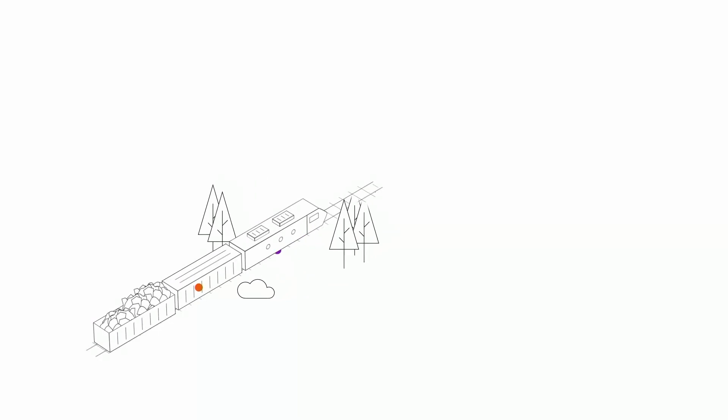Predge Rolling Stock is a cloud-based and hardware-independent analysis tool that manages data from various data sources. Data from onboard and wayside sensors, as well as historical system and component data, are collected and processed by Predge Rolling Stock as new data comes in. The actionable insights are provisioned to the different target roles in the organization.

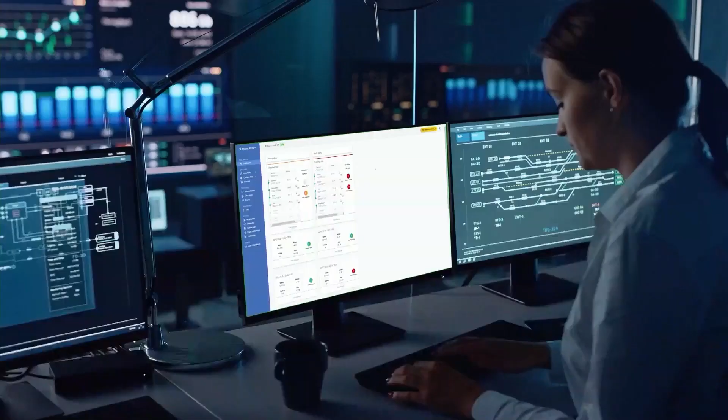Maintenance staff can directly obtain information that facilitates maintenance activities. Operating personnel receive information about asset conditions and operational performance. The outcome speaks for itself.

Thanks, Simo, for the videos. Great to see those testimonials in there. That must be very rewarding.

Thank you for elaborating what it is that Predge does. This will all make all the more sense when you, Stefan, elaborate what it is that voestalpine signaling does in this context. Before we hear how that all interconnects, because that's obviously going to be a very interesting part of the show. But before we do, please.

Thank you for having me back. It's a pleasure to be here.

So railway systems, as you know, signaling is part of railway systems, the world's biggest system solution provider for infrastructure, but also for systems, monitoring systems, rolling stock monitoring, infrastructure monitoring. So we have a lot of experience built up.

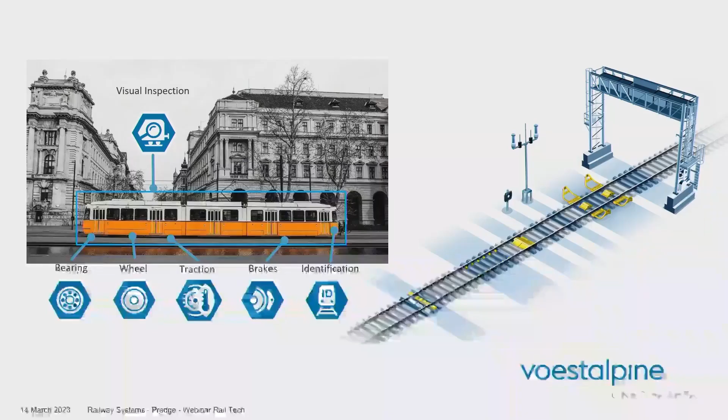And we usually looked at bearings, wheel sets, also the traction system, the brakes, identification of vehicles, which is very important because, as we talked last time, the identification is the key to then also do some maintenance, get history data in relation to the different assets to really see how an asset degrades over time.

So this is on the right side in this picture, you see also our checkpoints, so a combination of different functions. So you see all kinds of different functions in there. And as I said, we have a long-standing history already. And what I wanted to also demonstrate is the need for data analytics throughout our journey.

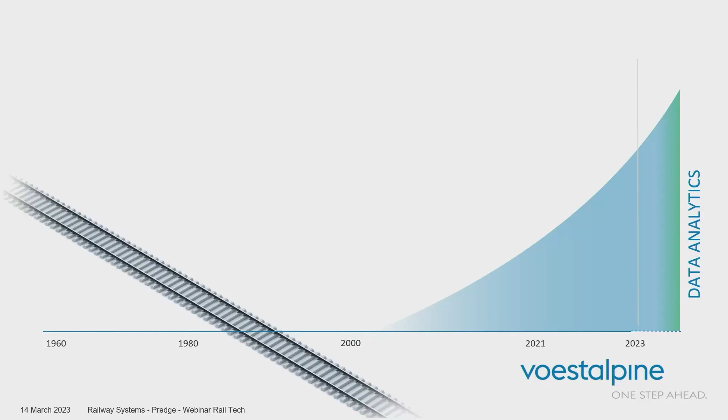So in the beginning, and this is a very crucial function, is the hotbox detection. So remember in the 60s, it's the classic, and recent events also in America, the catastrophic derailment, it demonstrates the significance of such a system.

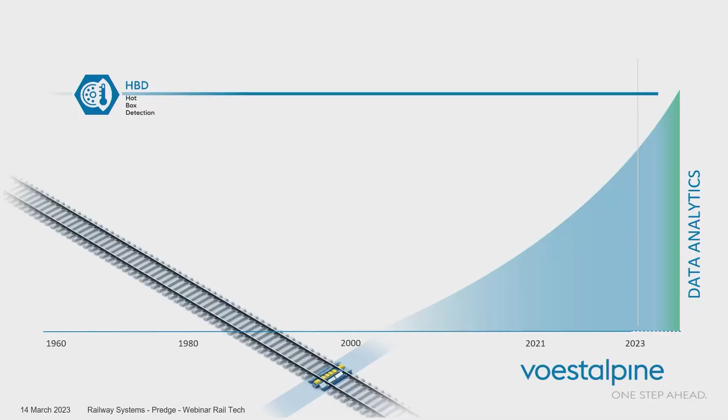And this kind of technology always alarmed. It just said, okay, you went above a certain threshold, the temperature is too hot, so I alarm and there needs to be a reaction. So when you combine that with another knowledge, with multiple HBDs, you get a series of data and you could already elaborate on that and do some trending and get additional information out there.

So already back then, there was a really primitive need for getting more information out of the data that you got. So quickly we innovated also into hot wheel detection, which is also an indication for how the brakes behave, for instance, and other functions like the wheel defect detection or weighing in motion, which is our WILD system where we also then detect defects on the wheel sets.

We then added the first time our central management software, which is the first time that we had a software in our place where we could manage the things, not only to look at the wayside monitoring equipment, but also to get history data, the alarming, etc.

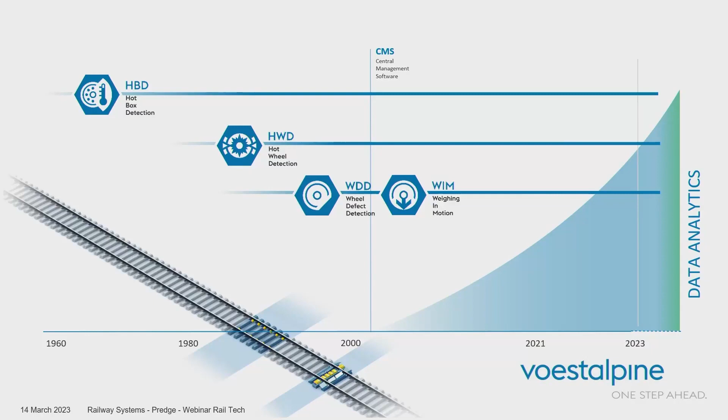So we already started very early with software, and we also built up basic analytic capabilities, but we were never recognized as really a data analytics company. And this is only natural because our competence and also the credibility towards the customers was always in the field of providing robust and high quality hardware, the sensors, and the IT infrastructure to monitor everything.

So we added a lot more functions throughout the years: environmental control, RFID tag readers, profile validation systems, and a couple of years back, our acoustic monitoring system. At some point we had so many functions that we wanted to do this modular, so you don't need a cabinet for each function. You want a modular approach with high degrees of standardization to build these checkpoints, which is a huge advantage for our customers since they can have standardized spare parts and add to existing checkpoints.

What I demonstrate here in the slide is that this is also the point where data analytics becomes more and more important, because the line keeps going up. Exactly, you generate more and more data over time.

So we had even more functions like hot motor detection, cracked rim detection, and last but not least, one of the last additions, our visual train analysis. Especially with camera systems, you have a lot of data involved. And it's fair to say, especially for viewers, it's important to recognize that a data analytics company's trustworthiness is only recognized by the customer's willingness to pay for the information they receive.

So the clients, Predge's clients, pay for information, not just data. But this does not automatically mean that they are also credible. To add the credible part, you need to build up a relationship with the customer and show that your analytics capabilities really bring value to the table.

This is one of the things where I can proudly say we're happy to have found Predge, because compared to what Predge can offer, we didn't have the credibility. We had the trustworthiness, our customer network worldwide, robust IT systems, and a lot of experience fusing data from different sources, like wagon series, etc. But we never dug so deep into the analytics part to provide this extra capability.

And based on what I've heard from Simo, there is a party that has that expertise. So I suspect that there's a lot of wheels here. You weren't about to reinvent the wheel, you sought cooperation, am I correct?

At some point you can only go two streams. Either you come up with a data analytics company by yourself, building up teams and trying to hire talent—and especially in data analytics, good people are hard to come by these days—or the other option is to try to acquire or cooperate with another company.

There are a lot of companies out there that already have a certain reputation, or claim they know special areas, but to really have the skill set and credibility in this specific field, we could only find in Predge. This is where we very early on tried to get in contact, and we hit it off quite from the start.

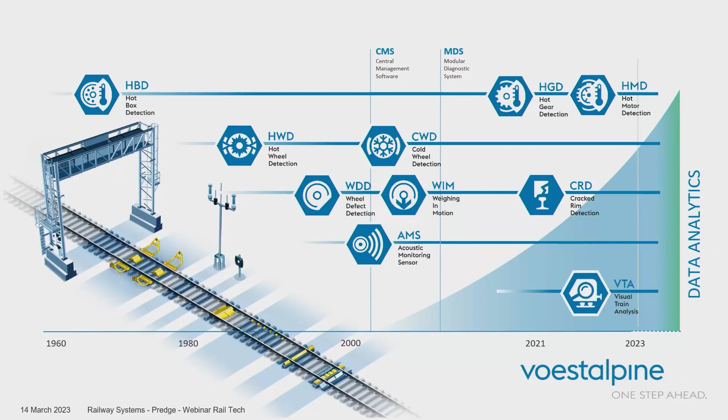We found that we have a mix and match here. Seeing and hearing all this, it makes sense that a legacy company of 160, almost 170 years old, would find a partner in a scale-up with 10 years of operation. But you could also be excused for thinking that's an odd matchup. But it definitely works—you have to think it through.

If you have somebody that goes to the client with expert knowledge in wayside monitoring—the infrastructure, how you build IT data streams, how you collect the data—and then somebody who has the means of understanding the customer's problem and narrowing it down to one specific problem and solving it, if you combine those forces, you can create a lot of value for the customer.

And we already have first success stories where customers see that value and see what we can do when we work together. In the next couple of years we will of course emphasize that and build it up. And when did this start?

Is this something recent, something set in motion a few months ago, or what can you tell us about that? I think the discussion has been going on for more than a year. It materialized during the last year—we did some tests, tried some things, and now we're in the phase where we know it will work. Now it's more about launching and doing this.

From Predge's side, looking at the cooperation, we're coming from the Nordic countries and going international—we have customers in the UK, we're going into Australia and different places. Seeing the possible cooperation with a leader company on the wayside detection side gives us more credibility. So that's where the match comes. I think it's a very good fit.

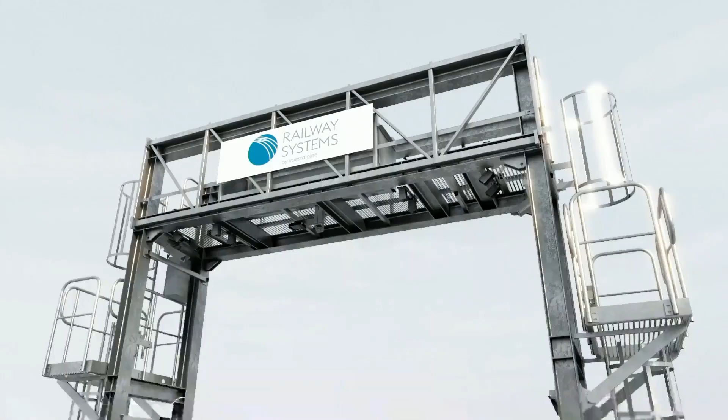So basically, what you see in the beginning is a train arriving at something we call a gantry with laser distance sensors, which is our profile validation system. It can also alarm on obstacles hanging from trains or other things that penetrate that safety envelope.

The next thing you see here is our acoustic monitoring, which can hear degrading bearings, but also other degrading things that you can measure just by looking at the sound patterns.

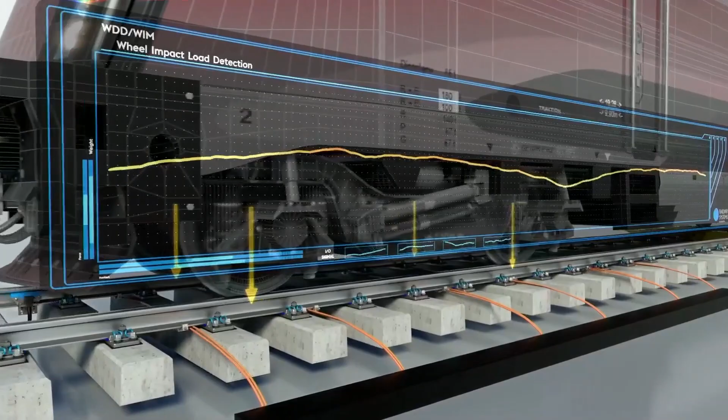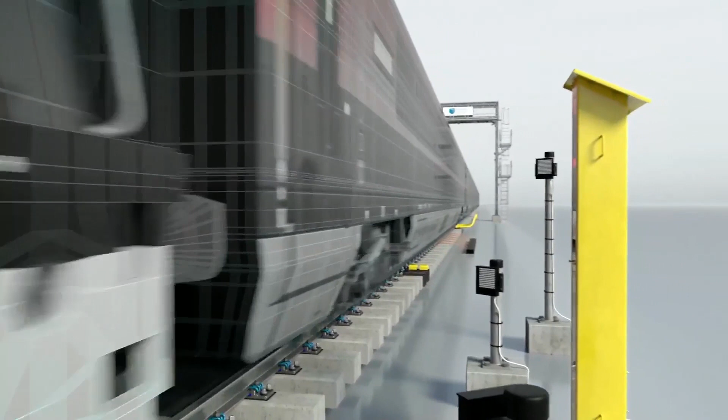The train now drives over something we call WIM, WDD, so it's a wheel set defect detection and also weighing in motion system. The next thing here is our traction motor HBD and HWD, so wheel set temperature and also bearing temperature measuring system.

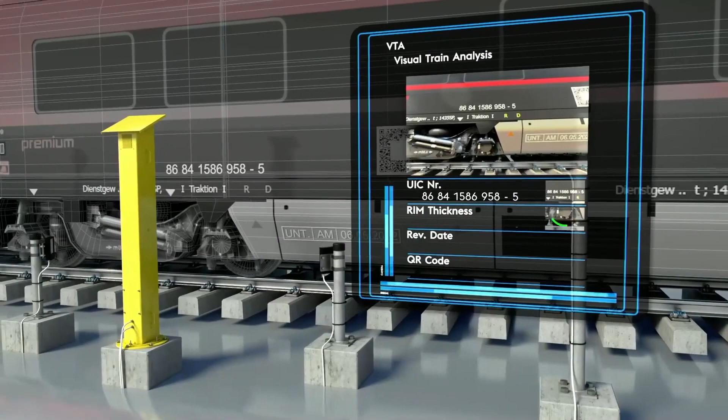Coming to our visual train analysis, where we look at all kinds of surfaces. We look at wheel sets, the carriage, undercarriage, the surface upsides. You see number recognition, rim thickness, QR codes, etc. Everything that you can visually inspect.

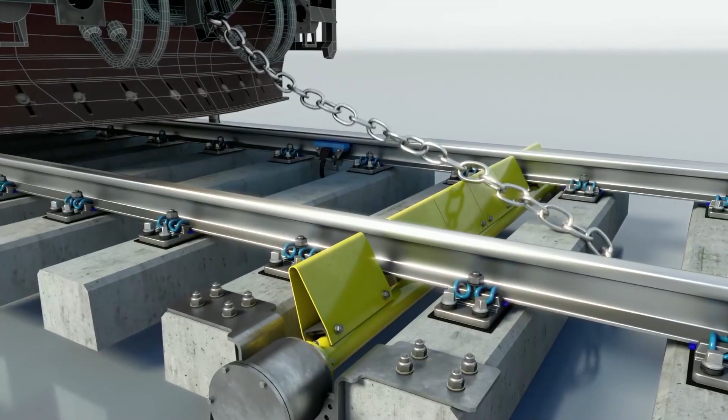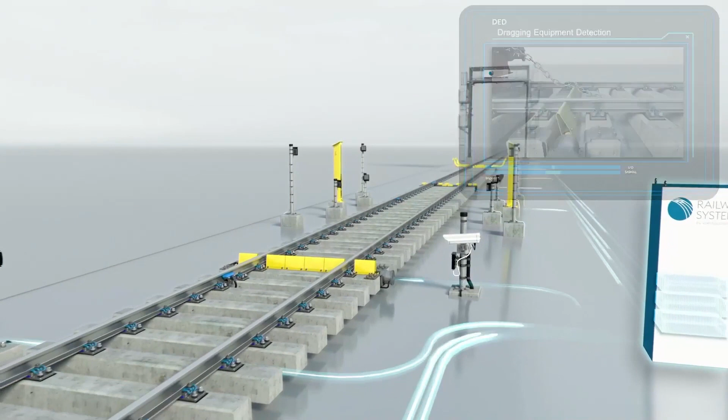I think the important point here is that all this data is flowing into something we call the trackside cabinet, and from there it's further transmitted to our central system.

Amazing, thank you, Stefan. In the meantime, I've been joined by your colleague, Richard Lenthall, and Predge's Dr. Wolfgang Birk. We've heard from the company, so maybe a quick introduction, Wolfgang, what it is you do at your organization, and from you yourself, Richard, maybe quickly elaborate on your role. Yeah, I'm Wolfgang Birk, and I'm CTO at the company.

I'm part of Predge since 2015, so I have been working a lot with the development of the analytics solutions that we actually provide.

Richard, welcome back. I'm Richard Lenthall. Hello, once again. Hi, good to see you. I'm the Vice President of Customer Management at voestalpine Signaling Siershahn. As part of Stefan's team, I'm responsible for the commercial activities of the organization around the world.

So we've heard from your esteemed colleagues about their separate skills, how they complement each other, how they interact. I believe now you, Wolfgang and Richard, will elaborate on what it actually is you offer, the added value for the client, and where the different skills really complement each other. So I think, Richard, you will start things off.

Yeah, indeed. So as Stefan was guiding us through just a moment ago, what you see on the screen in front of you really is what we call the Phoenix MDS checkpoint, an arrangement of our monitoring functions that can be installed in or around the track to pick up information from passing trains.

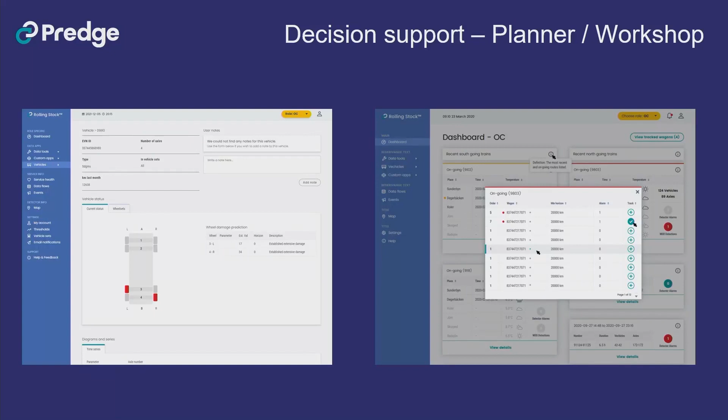But if you show that, the first reaction of a customer is, well, this is not me, I have a different process here, I have a different way of working, maybe. What we usually tell them is, well, this is just an interface as an example, because it can always be tailored. We have to be flexible and meet them on the playground they act on, on that everyday business. So if they need something which would look like this, then that's a perfect match. Quite often it's not so different from that in the end, but we have to listen to them.

Now, speaking of needs, I'd like to take a moment for a question, because we have one come in that wonders, since there's so much possible nowadays, where does your reach end within the control of the railway line? Can you inspect either with sensors or fiber optics, with the ultimate goal of predicting something like rocks falling on tracks, and how do you put that in place?

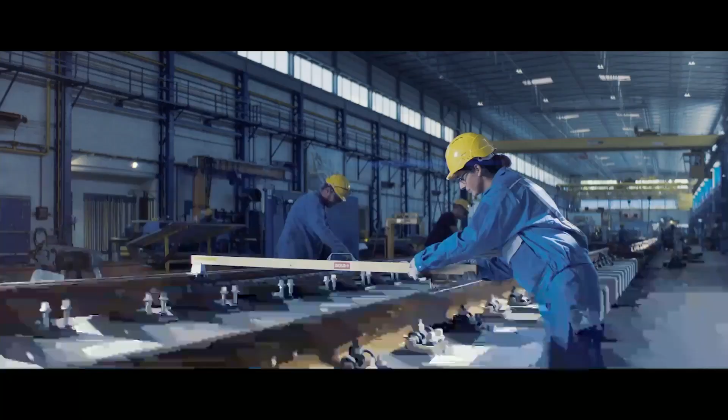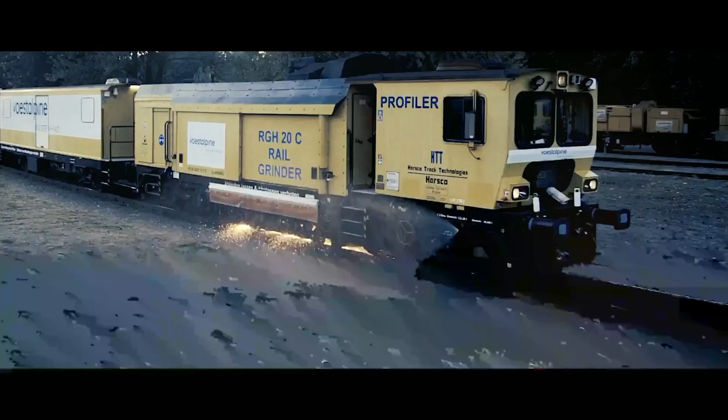The source of our success is us, the team of voestalpine Railway Systems. We are researchers, seeking advanced materials and geometries. We are workers, creating rails and turnouts with state-of-the-art production systems. We are developers of smart solutions for the railway infrastructure of tomorrow. It is all of us who deliver track components just in time to any location, and it's us who offer a comprehensive service portfolio along the whole life cycle of our products. We develop the most innovative solutions with a focus on the optimization of life cycle costs to keep our promise. We are more than 7,000 colleagues working at 70 locations on 5 continents, combining our knowledge, experience, and talents for the benefit of our customers.

This is our contribution to modern mobility and a green planet worth living for future generations. This is us, the team of voestalpine Railway Systems. And together, we ensure performance on track. voestalpine, one step ahead.